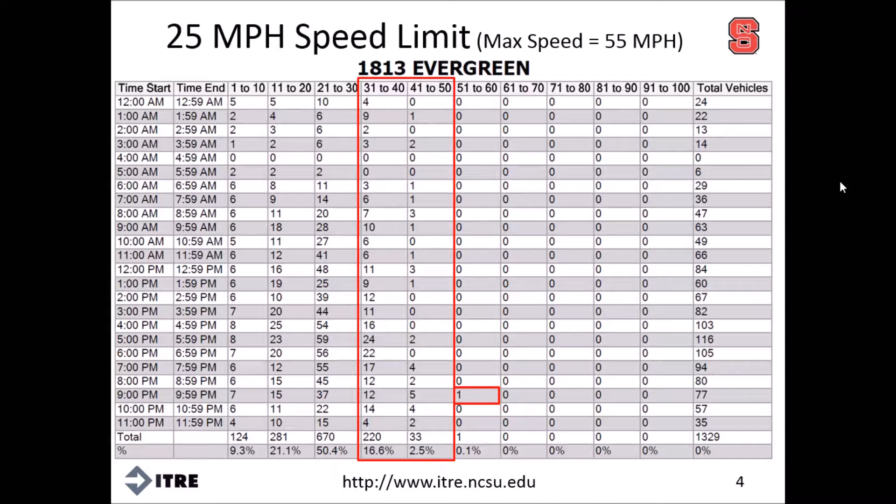But one of the big takeaways from this is that if you think about who the people are who are speeding on these roads, this is not cut-through traffic. These are residents. So within a fairly small neighborhood community, most of the people, or probably all of the people who are exceeding the speed limit, are actually people who live on the street. And if those people can't be motivated to maintain safe speeds, to increase safety or increase livability of the street, you can imagine it would be difficult to get other drivers, particularly those just cutting through a neighborhood, to observe safe speeds. And really the heart of this issue is when you look at the relationship between vehicle speed and pedestrian fatality rate.

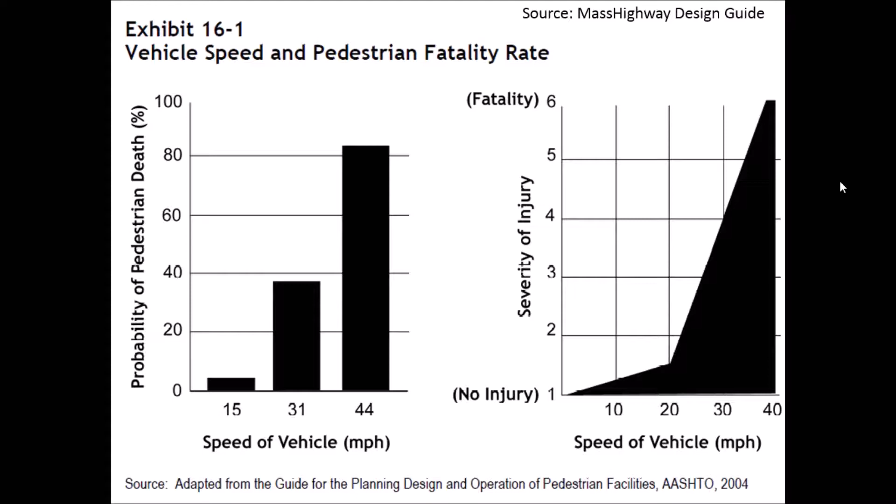So this is really the crux of the issue when we look at traffic calming and the impacts of speeding in relation to pedestrian and vehicle strikes.

When we're talking about traffic calming, the state of the practice document from the FHWA and ITE states traffic calming as actions that serve to minimize the undesirable impacts of motor vehicles on local human activities. Accessibility and mobility should not significantly be reduced. So there's a balance here that needs to be struck between the local human activities and then on the vehicle side, accessibility and mobility. So it is a delicate balance, and some places have done this better than others.

It's not the same thing as traditional street design, but the goals really are similar. Typically, traffic calming is a retrofit to an existing street, and the programs that address traffic calming can be fairly simple or very diverse.

Streets, traffic problems, and neighborhood preferences are not all alike on all streets, and so individual traffic calming treatments must vary accordingly. Programs typically start with one or two of their favorite or preferred measures that have worked well in their communities, and then begin to experiment with others as their favorites may have limitations that become more obvious. The trend is toward diversification, using multiple measures on a single street or at even a single slow point, as we will talk about in the upcoming materials.

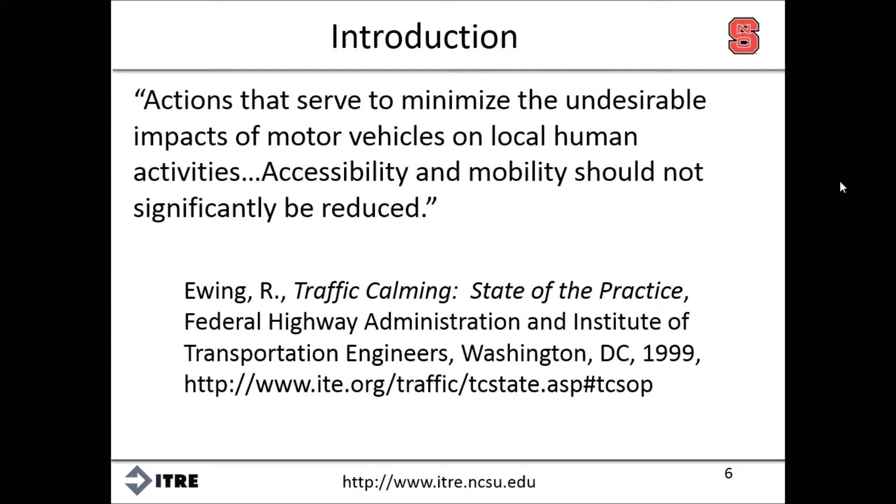The Woonerf is known as a living street, an idea to calm traffic and restore the balance between people and automobiles. This is a concept popularized in the Netherlands in the 1970s as a reaction to the dominance of automobiles. In the first few years after World War II, Dutch transportation engineers emphasized relocating bikes onto separate paths to accommodate vehicles. This created backlash, and the country then moved in the opposite direction, where motorists were forced to make accommodations for everyone else. The intent of a Woonerf is not to make cars disappear, but to integrate them and other users of the street into a shared space.

In 1976, the first Woonerf appeared in the city of Delft. Actually a decade earlier, but the traffic regulations came in 1976, and it has been used there with success in helping to mix vehicles, pedestrians, and bicyclists. So this is a fairly uncommon type of design to see in the world, but it is being done in the Netherlands and other places.

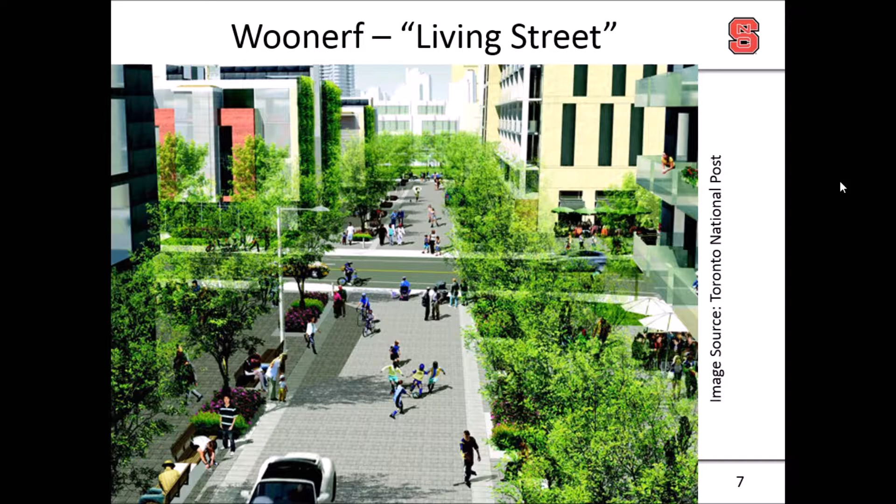This image is actually from a project in Waterfront Toronto that was under construction as of a couple of years ago, so at this point it may be complete.

So we need to think about measures of effectiveness when we think about traffic calming. I've talked about a couple already, primarily volumes, speeds, and collisions, but there are others that may be of interest to an agency, including visibility and forgiveness, setting expectancies for all road users.

Emergency access is a big one, so making sure the traffic calming measures put into place do not unnecessarily restrict access from and to emergency vehicles. Providing space for other users may be a concern. Aesthetics, harmony, and context could be measures of effectiveness, though those may be difficult to measure objectively. You may look at business impacts, the level of rents, house and land prices that may be affected by having higher livability. Noise and air quality may also be important factors for a community.

Typically, speeds are the most important when dealing with traffic calming, and certainly one of the easiest to measure. Emergency access, though, is a big issue and can be a concern or a roadblock to traffic calming. And when we talk about space for other users, this is primarily relating to pedestrians.

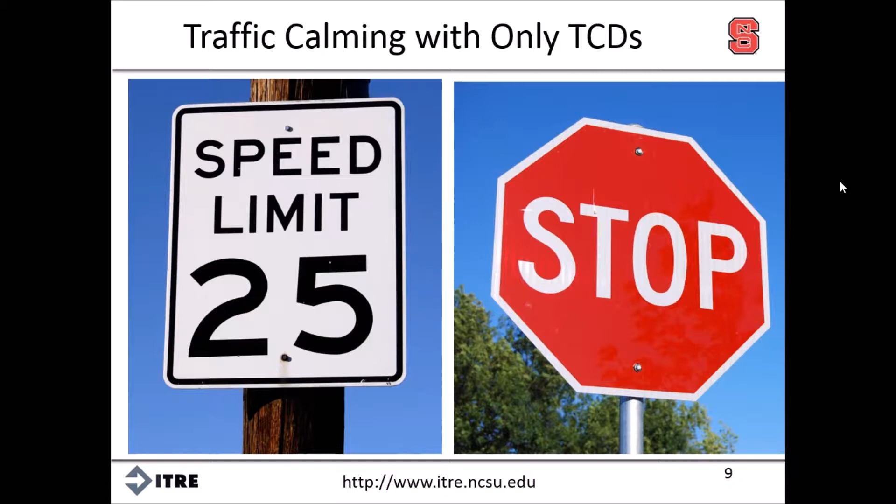Automated speed enforcement also looks promising in terms of a traffic control device, and is being used in limited capacity throughout the United States and more places around the world.

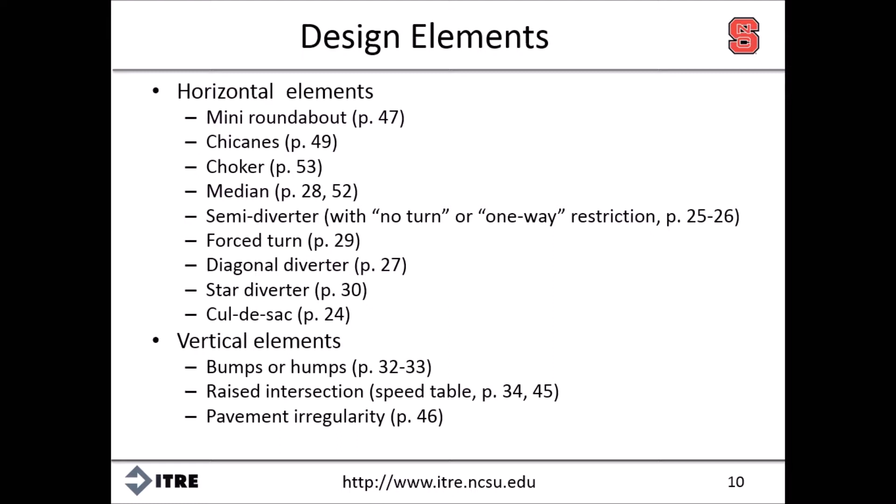There are a variety of design elements, including some that can be lumped into the horizontal elements category and others into the vertical elements category. So in the horizontal elements, we're looking at adjusting the movement of traffic from the left to right, essentially the horizontal direction, and then vertical elements move the vehicle up and down vertically.

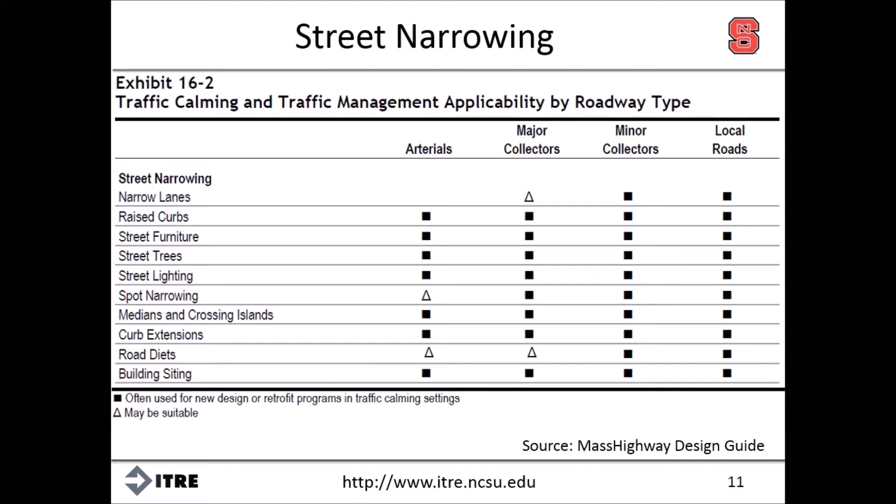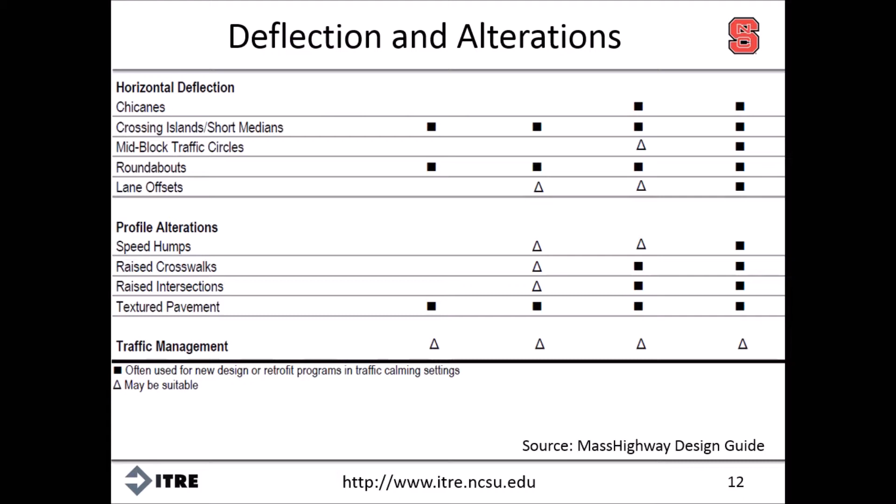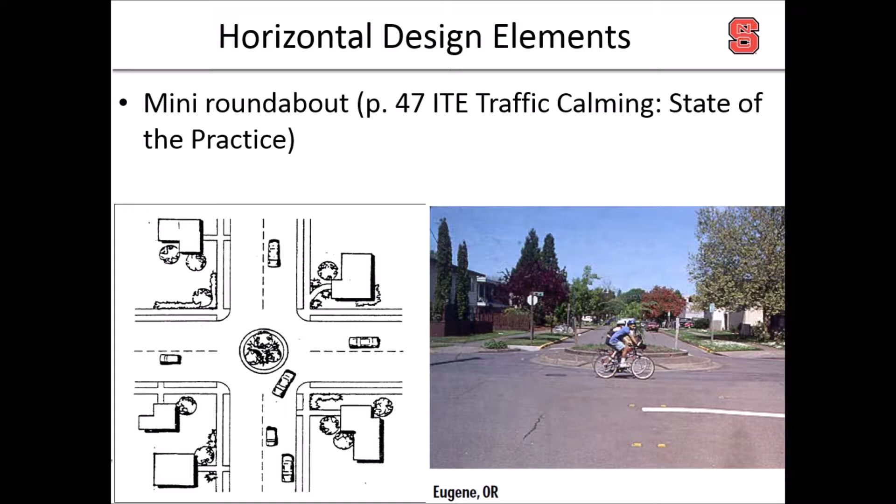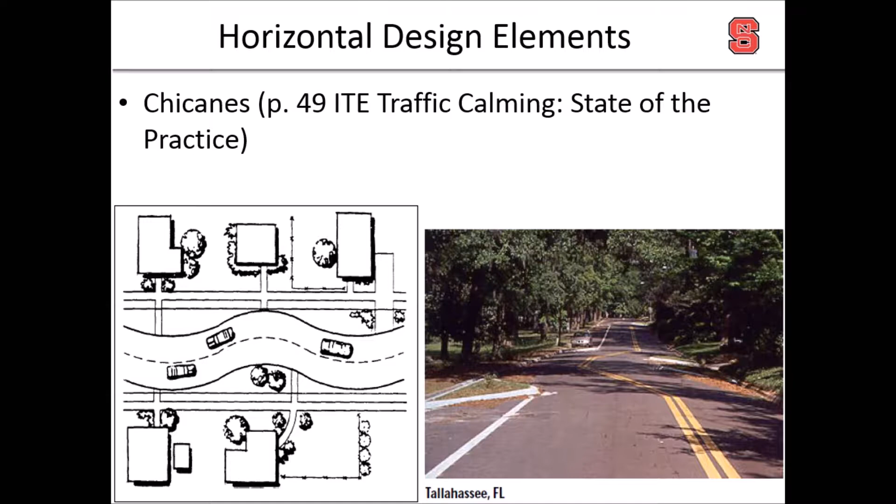Mid-block deflection elements can be added. So this is an example from the Massachusetts Highway Design Guide of how these treatments can be installed and their typical dimensions, as well as street furniture that can be added along the edge of the roadway. And so typically from the roadside design perspective, we usually want to have street furniture or objects further back from the roadway, but when they are close, they do encourage drivers to slow down. So there is a kind of a balancing effect that's necessary there to balance the safety effects of potential collisions with these objects with the traffic calming nature of them.

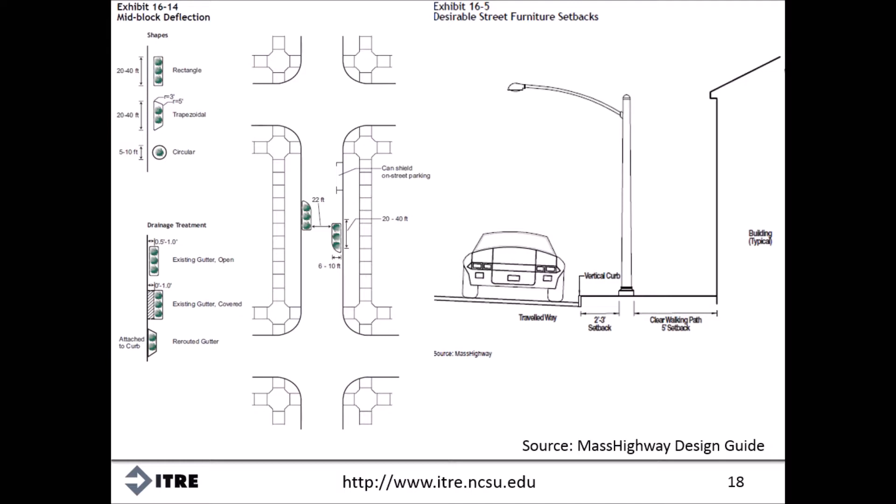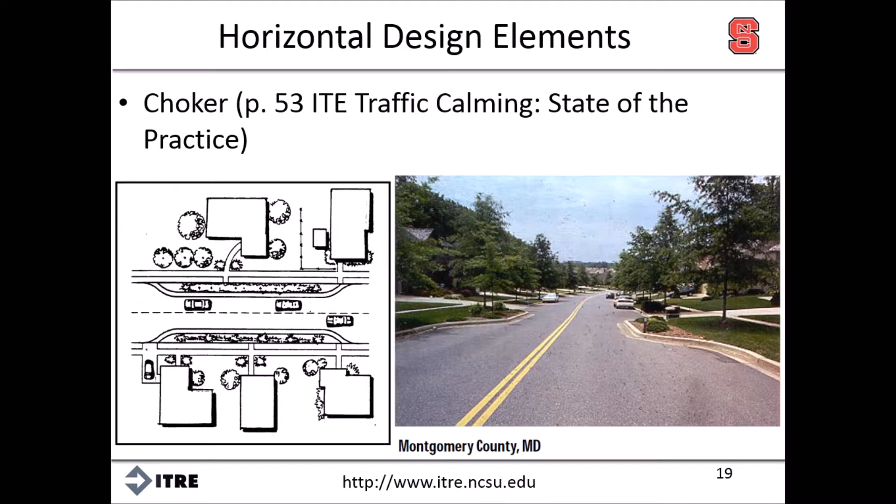A very similar type of design is a choker. So this is just basically squeezing in of the roadway. So if you have a large roadway, particularly one that has on-street parking, if that on-street parking is not commonly utilized, it may be beneficial to add a choker to have that physical narrowing of the roadway at this point. These are also called pinch points, mid-block narrowings, mid-block yield points, constrictions, and maybe other names.

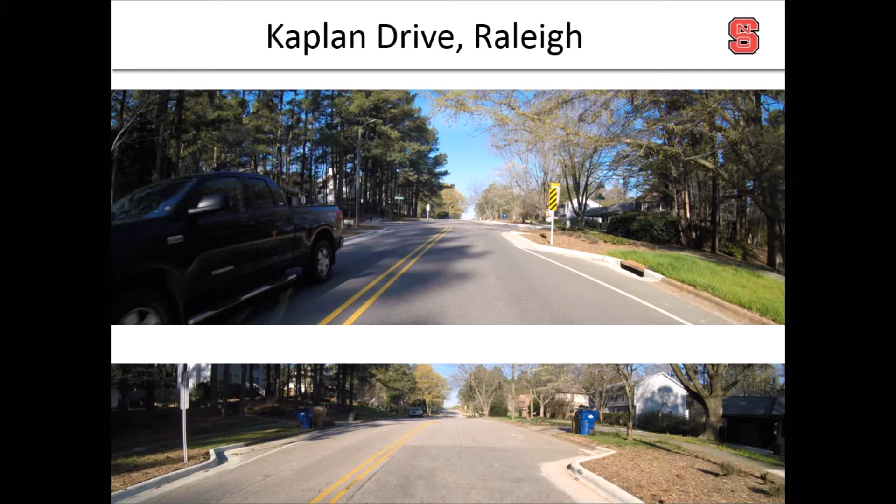Here's an example locally, Kaplan Drive in Raleigh, that has some chokers, again just kind of pinching in or narrowing the roadway at points. Otherwise, the normal cross-section on this road allows for on-street parking, but as you can see in these images, there's not a lot of on-street parking, so there's typically not much friction that on-street parking provides to the vehicles. And again, some specific design guidance on mid-block street narrowing efforts.

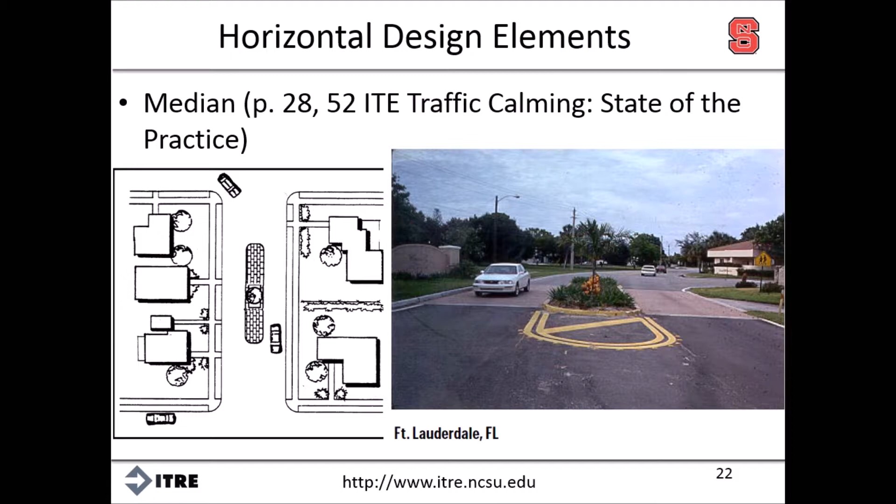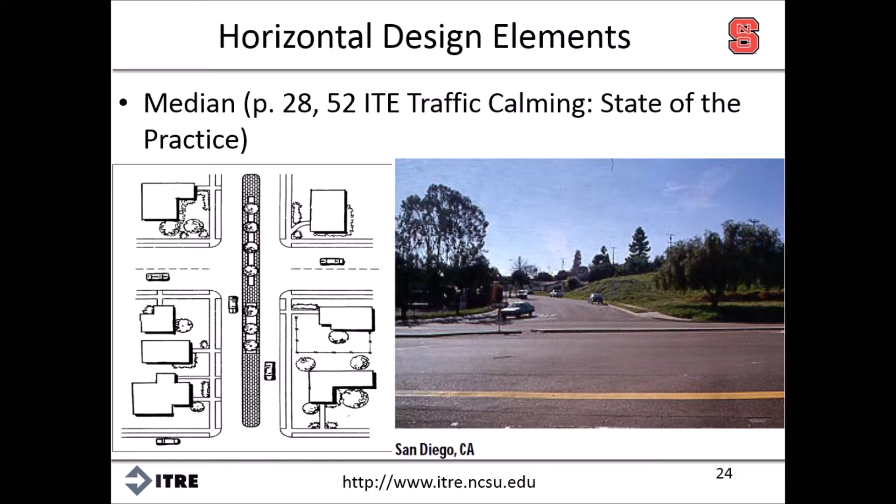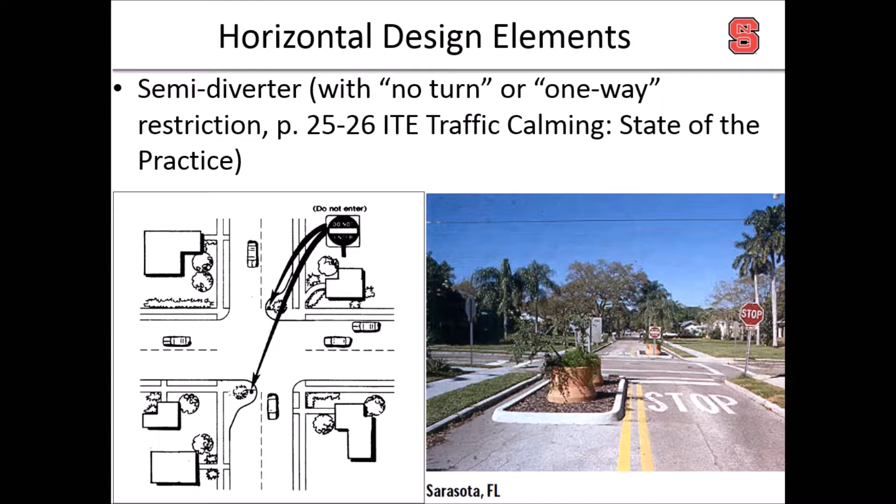Here's another example of a median, in this case also affecting the through traffic between side streets, so that can be another benefit to having a median element in the roadway. There are semi-diverters, so this essentially turns streets into one-way streets, or you can have no turns at these locations. So at the end of these side streets, only one-way traffic going out is allowed. The nice thing about this is emergency vehicles could still access these streets, so it doesn't completely shut down the street for emergency access, but for normal operations, only one-way traffic is allowed at these locations.

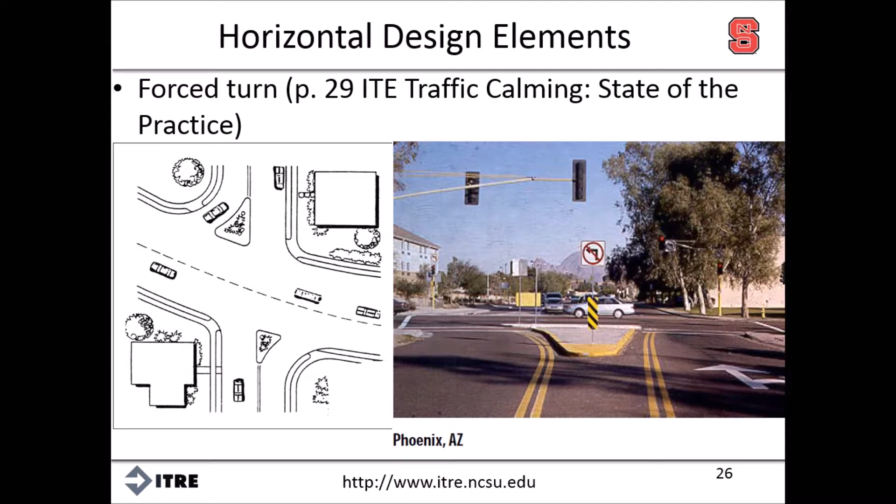You may also have forced turns, so in this picture we see a no left turn at this intersection. These types of islands are also called pork chops because of the shape, or right turn islands, or forced turn channelization. So again, a lot of these treatments may be called different things in different locations or by different agencies.

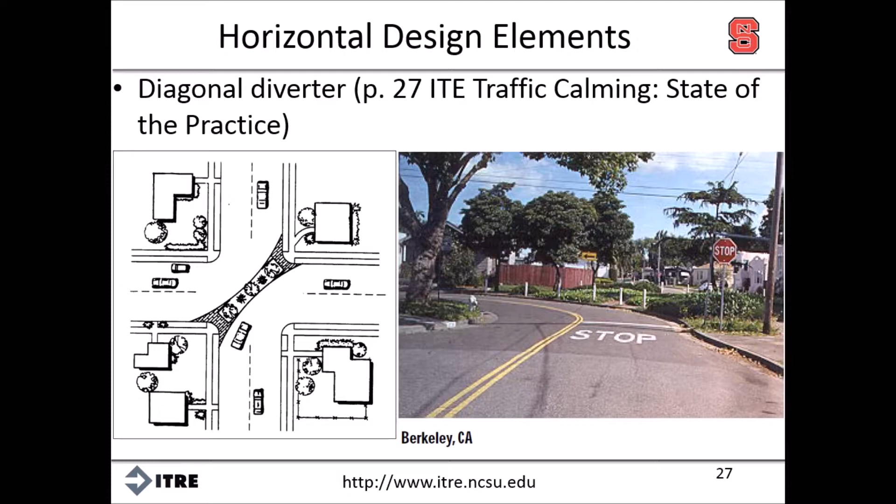A diagonal diverter, also known as a full diverter or a diagonal road closure, essentially shuts down possible movements at a four-leg intersection. You may, though, as shown in this image, allow bicyclists to travel in any direction by making part of the area traversable for bicycles.

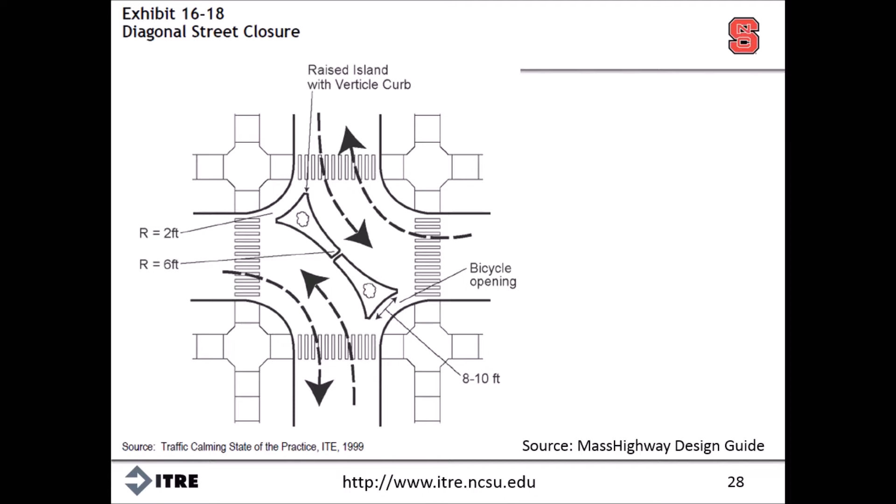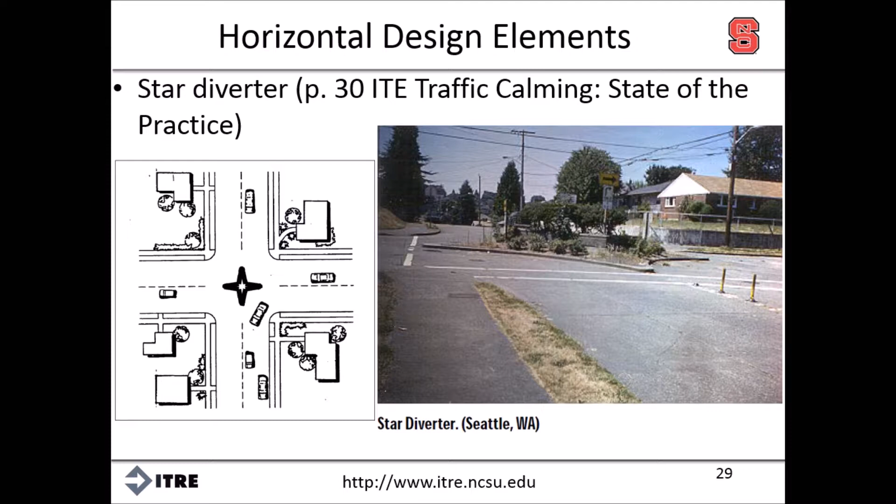And some of these details again shown here that would allow for a bicycle opening with this type of treatment. A similar concept is the star diverter. So instead of allowing some of the through movements, it basically forces everyone into a right turn at each of the approaches to the intersection.

Cul-de-sacs may also be used. Actually, this is a pretty severe design element, so shutting down the street for through traffic. But again, you may allow access through the street for emergency vehicles or for bicycles.

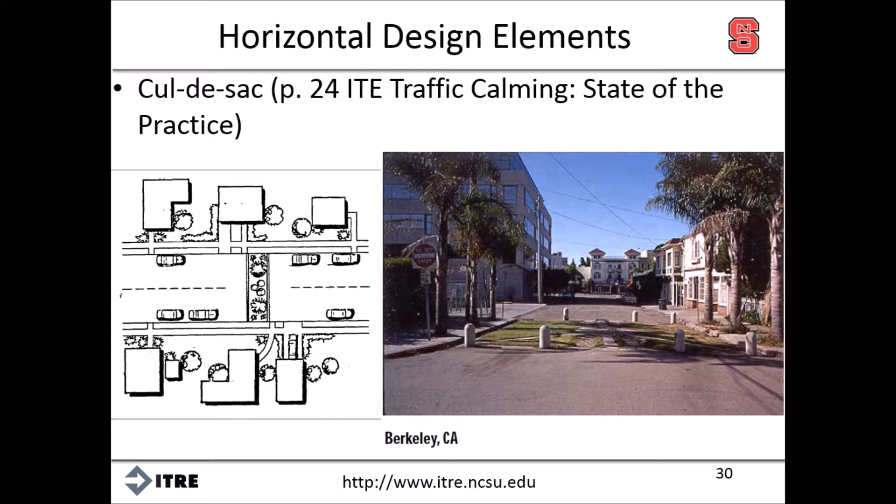Other elements may be specific to parking, again using the on-street parking to help constrict the flow or the speed of traffic. You may use some fixed physical elements to narrow the lane width, narrow the roadway width.

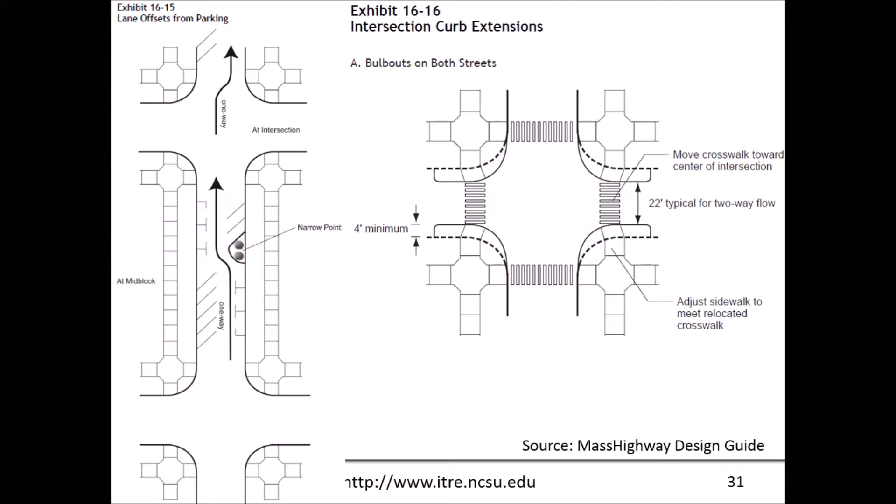Intersections are also an area of concern, a way you can encourage or support pedestrian use by having bulb outs on streets to allow pedestrians to get a little further out into the roadway before they attempt their crossing. This is particularly helpful if there are parked cars adjacent to these locations to allow the pedestrians to be more visible to vehicles and vehicles to be more visible to pedestrians.

There are a lot of vertical design elements as well. It's always interesting to me. Different speed humps have different profiles. It's possible to have some that follow a sine wave or are circular or parabolic or flat topped. And so the next time you drive over a speed bump or a speed hump, see if you can determine which type of design is used.

ITE recommends that vertical design elements, particularly bumps and humps, should only be used on local roads, typically should only be on roads with 2 lanes or fewer, and shouldn't be heavy transit, truck, or emergency routes. Speed should be relatively low on those roads, 30 miles per hour or less.

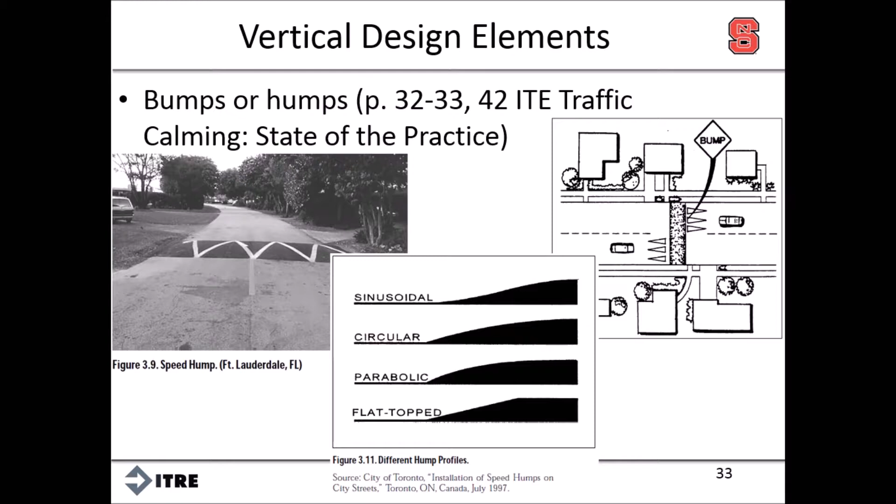It should probably have a speed-related collision problem to put in such an effective and physical element, and shouldn't be near an intersection or a sharp curve, and should also have support from most of the residents.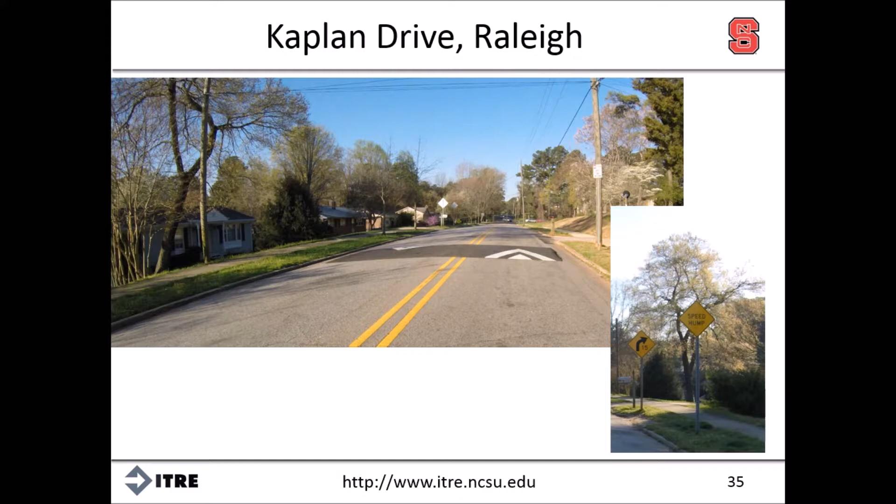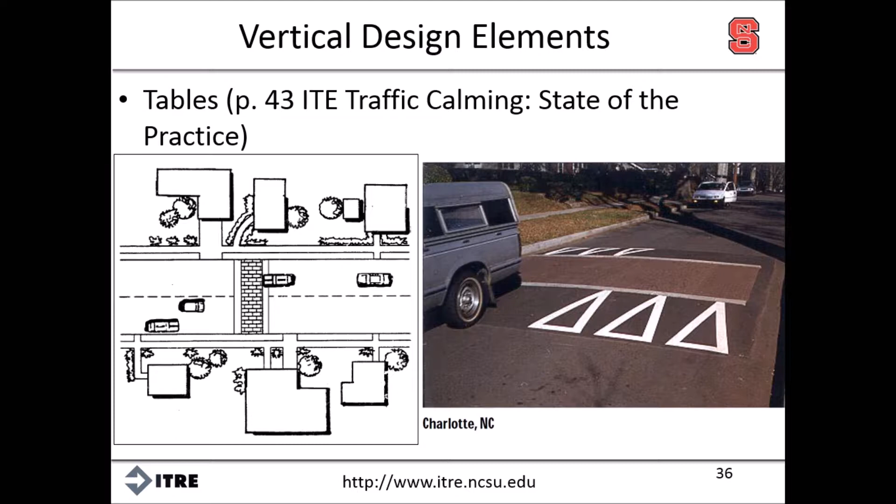Here's an example of a speed table. Several of these are present on NC State's campus. In a similar type of effect, entire intersections can be raised that will help decrease speeds or calm traffic. These are also known as raised junctions, intersection humps, or plateaus, and maybe other names in local agencies.

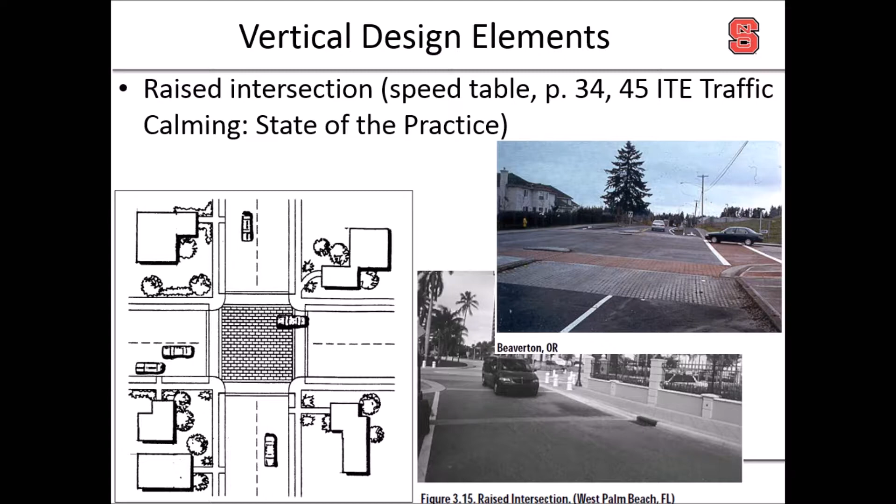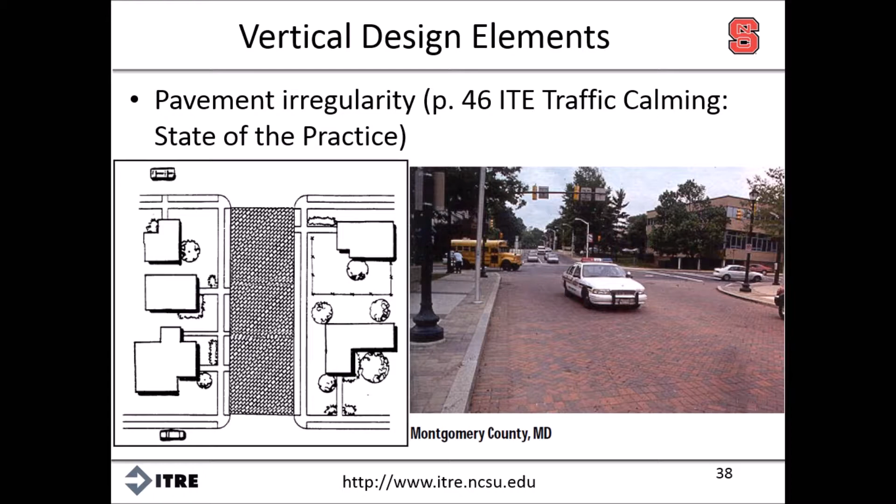Related to that, you can use pavement irregularity to calm traffic, basically sending the message something is different here. There's a different pavement texture. Usually it's very obvious that something is different and that the driver should pay closer attention, particularly to mixing of other modes. Maybe there's a higher prevalence of pedestrians or bicyclists expected in this area.

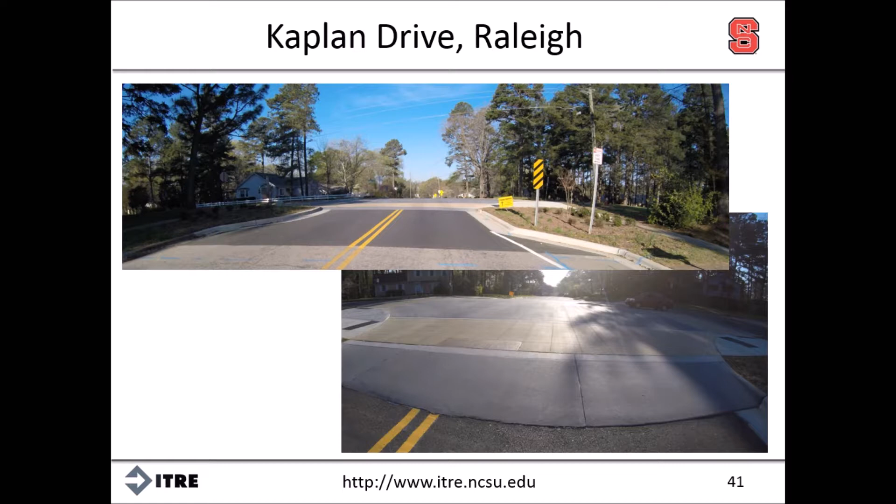And like our other examples, Kaplan Drive does have a raised intersection that also has different textures with it. So again, a mixture of treatments were applied to this roadway segment, a fairly short segment with a lot of different treatments.

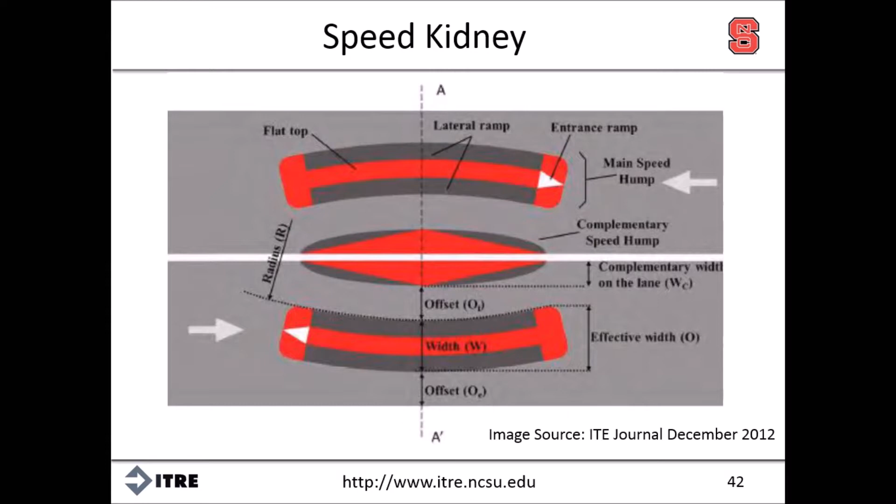A new type of vertical combined with a horizontal element was recently presented in the ITE journal, referred to as a speed kidney because of its shape. And there are several ways this could be driven. It could be driven with one set of wheels that drives up on the vertical element.

The driver could also try to straddle the curved portion without having to drive it vertically, but would still likely slow down the vehicle to make that type of maneuver. Or the vehicle could drive it on a curved path to try to avoid the vertical components of the speed kidney.

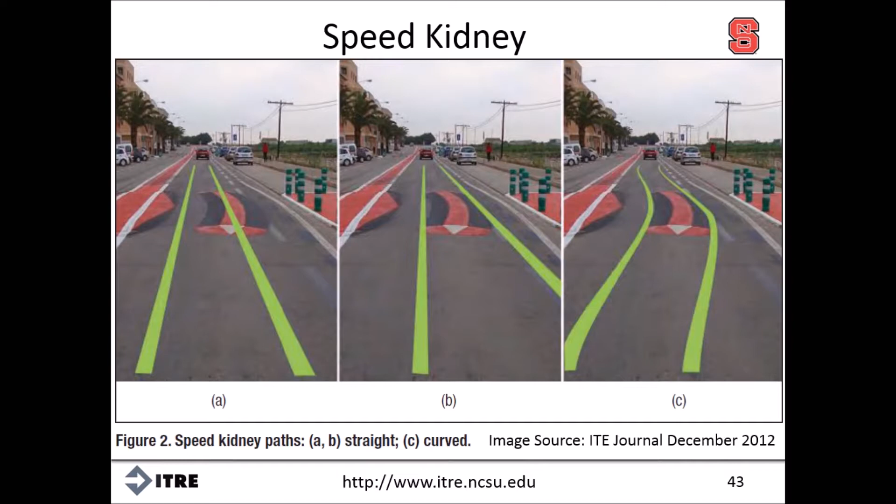So this is again a new idea, and maybe there are other new ideas that you may have that can help with traffic calming or implementing some of these known elements to a new location that hasn't had one before. When we're looking at vertical elements, we have to be very careful about the spacing of those slow points.

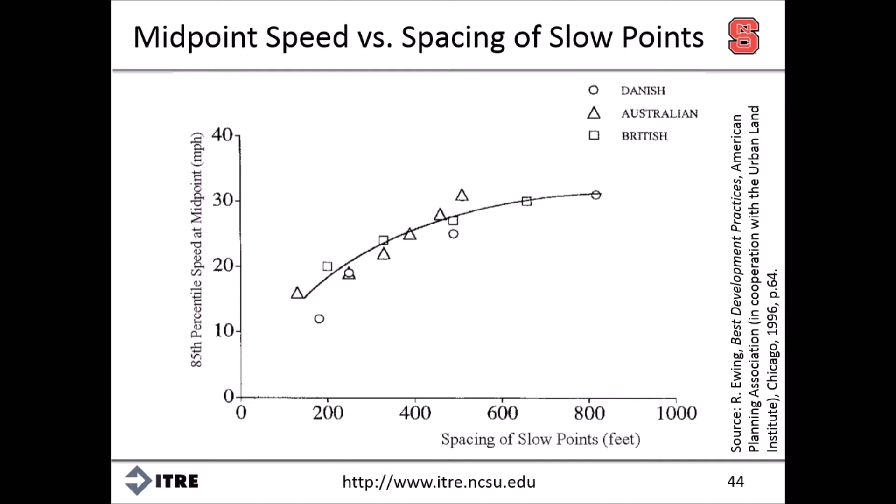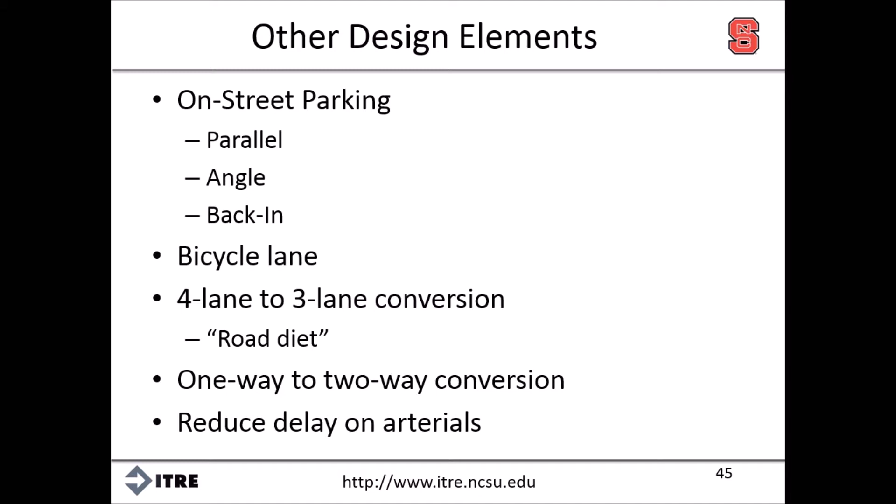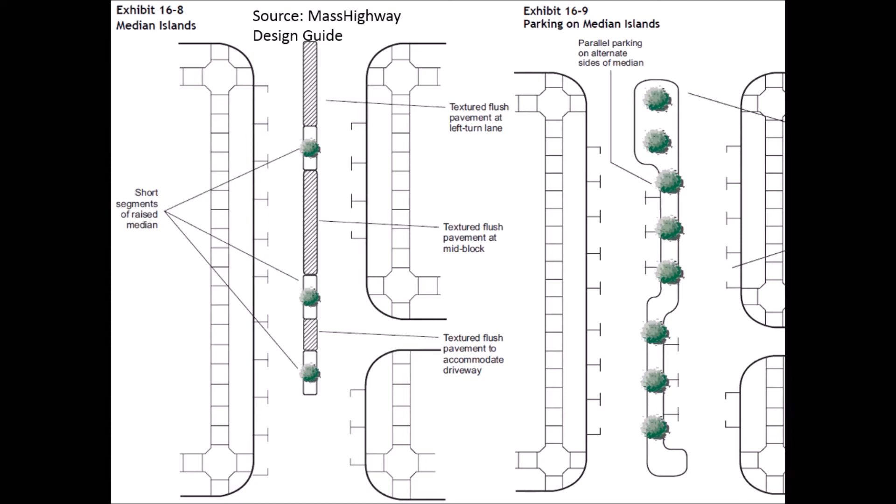And also another option is just to reduce the delay on arterials. So if you want to encourage drivers to leave neighborhoods, leave local streets, if arterials are improved, maybe signal timing, maybe it's a capacity issue, you may be able to divert drivers out of local streets and onto the arterial network, which may be a more appropriate place for them to be to begin with. So we have some design guidance on parking, median islands, some of the dimensions required for curbside parking or head-in or back-in diagonal parking.

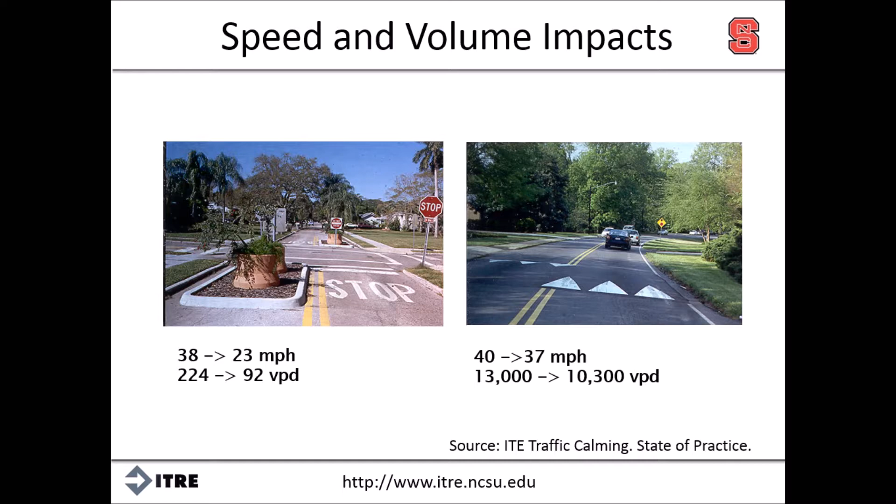So it's also important to consider how the speeds and volumes will be impacted by a particular design. So looking at a couple of these treatments, this one with restricting entering traffic had a substantial effect both on the speed and on the volume. The speed humps had some effect, reducing the speed somewhat and having somewhat of a volume effect. So again, the thing we've got to think about though is we likely did not just lose these vehicles. They didn't just stay home. They're likely on other routes. So we've got to be careful that we didn't just move our problem to the next adjacent street.

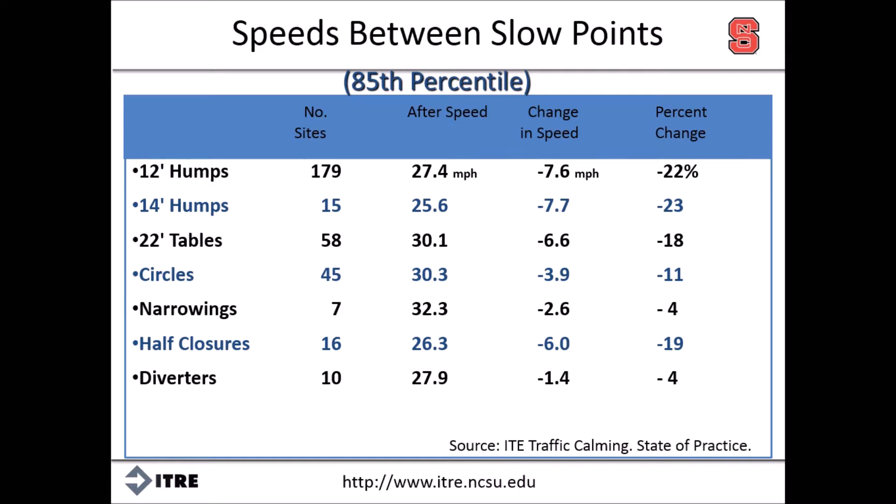A little more details on the speeds between slow points for different treatments. So looking at the change in speed, you can see the smaller humps, or the more abrupt humps, those have a larger effect in reducing the speeds than tables and narrowings, half closures, or diverters, but all of them appear to have the desired decrease in speeds from the before to the after.

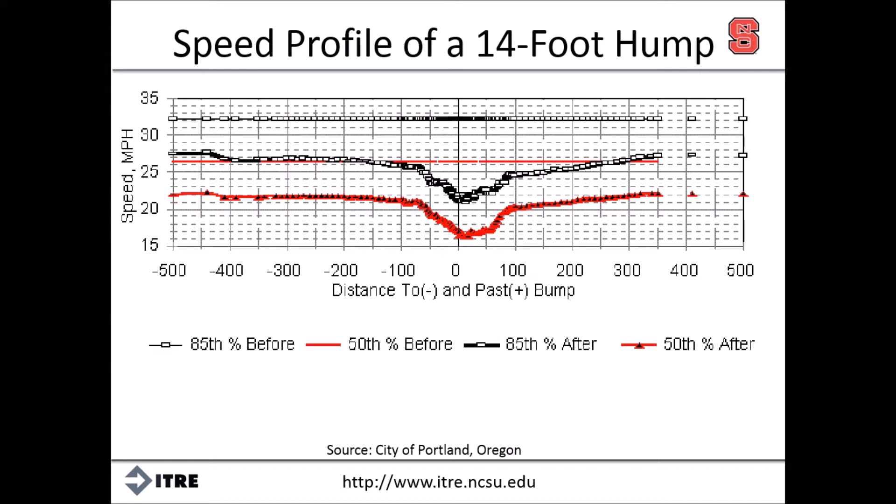And you can see at the point where the speed hump is located, that's at 0 on the x-axis, the 85th percentile speed drops down to 21 miles per hour, and then drivers will speed back up, but still substantially below the 85th percentile speed before the treatment. We see a similar shape to the 50th percentile speeds.

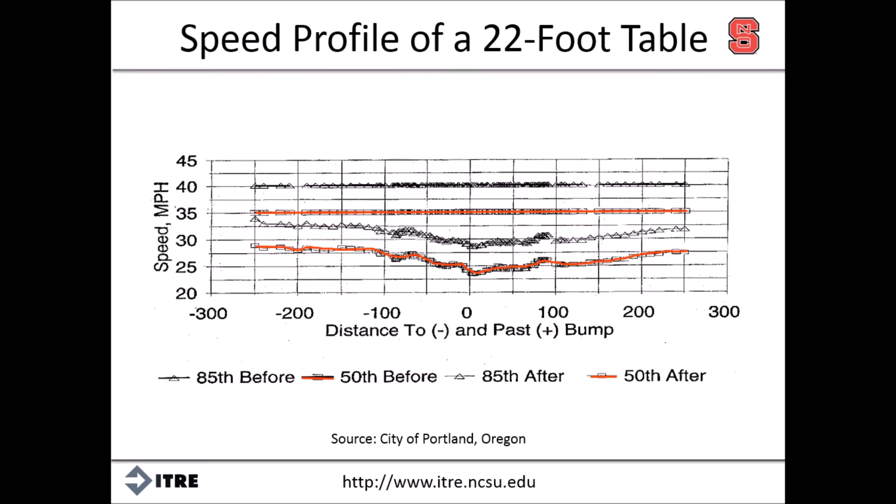And this is the same type of information for a 22-foot table. Both of these were from the city of Portland. But in this table, the speed table, there was less of a pronounced effect on speed, so more of a gradual slowing and then speeding back up compared to the more abrupt speed hump in the previous graph.

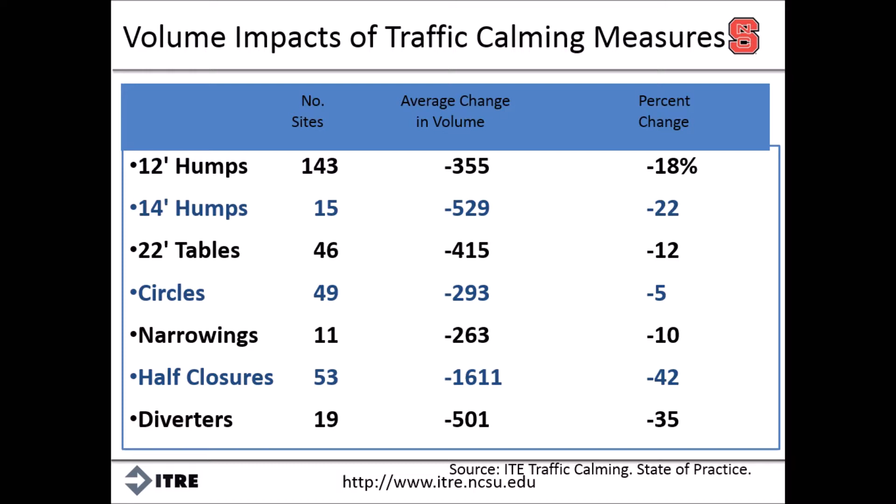It may also be important to consider the volume impact. So the previous information was focused on speeds. How also are the volumes affected? And so we can see with the introduction of these treatments, the volume decreased, some more substantially than others. And the reason for this can be the location.

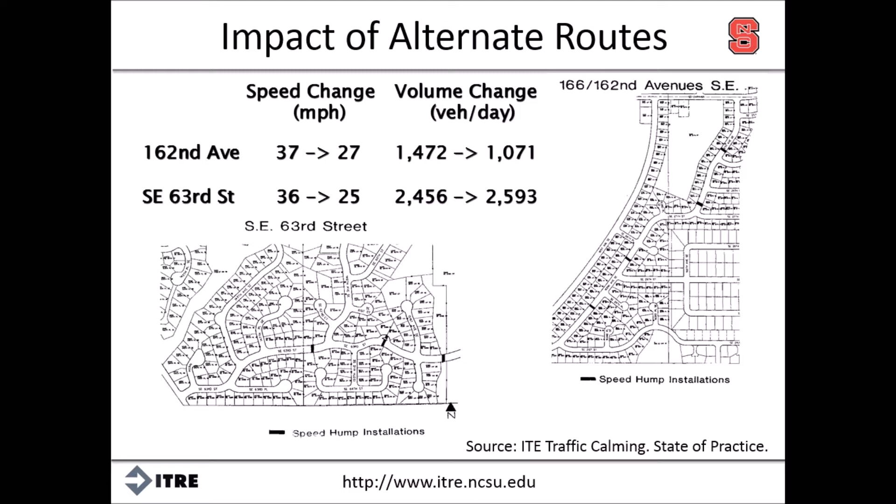So in this image here, Southeast 63rd Street, the speed change was fairly substantial, but the volumes actually did not change. And that's likely because if you look at 63rd Street, which is kind of the main arterial or main collector through this neighborhood area, you can see there really are not many alternatives. But if you look at the image on the right, looking at 166th and 162nd Avenues, 162nd has the speed humps installed on it, with 166th being a reasonable alternative. So basically the volumes there decreased substantially from 1472 to 1071. So likely that additional traffic shifted over to the adjacent route.

In terms of collisions, the international experience has shown substantial savings in terms of collisions with a variety of these traffic calming measures, from chicanes at 82% reduction in collisions, up to, in this graph, showing one of the less effective but still an effective collision reduction factor related to speed limit reductions of 30%.

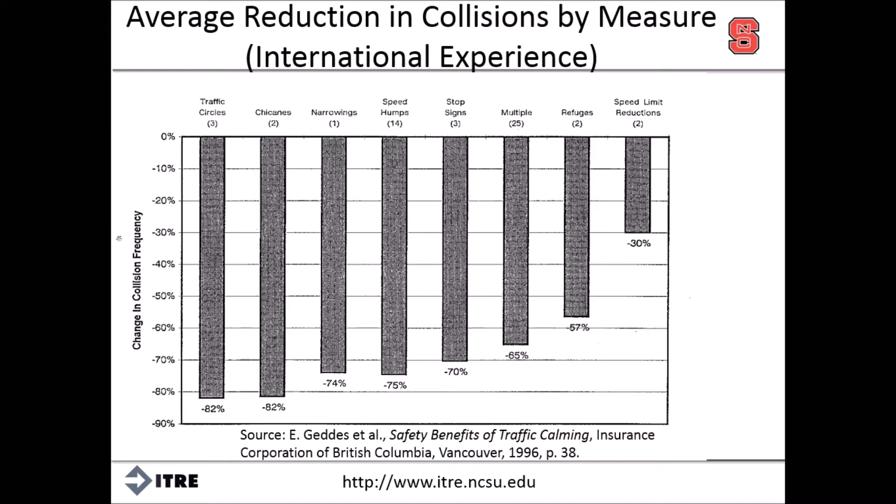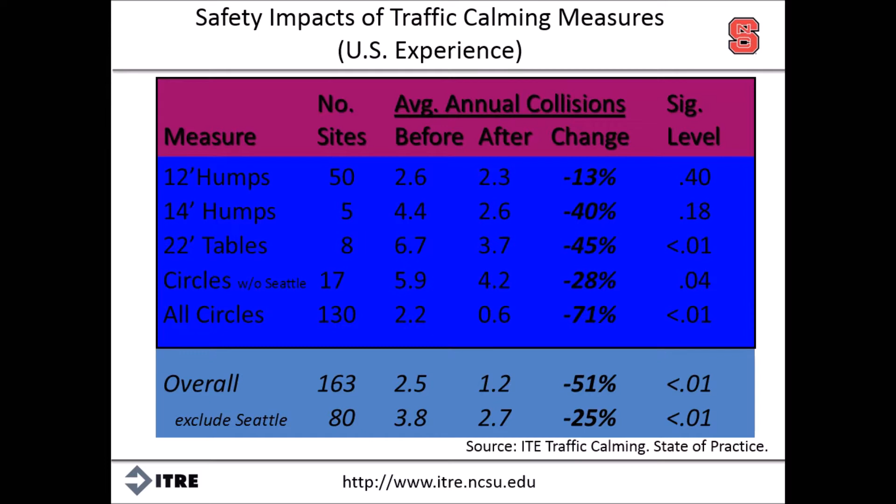In the U.S., there have been changes seen in the number of collisions with some of these treatments. A lot of the more substantial collision savings were found in Seattle, so excluding those, overall with this mixture of treatments, there was a 25% reduction in collisions.

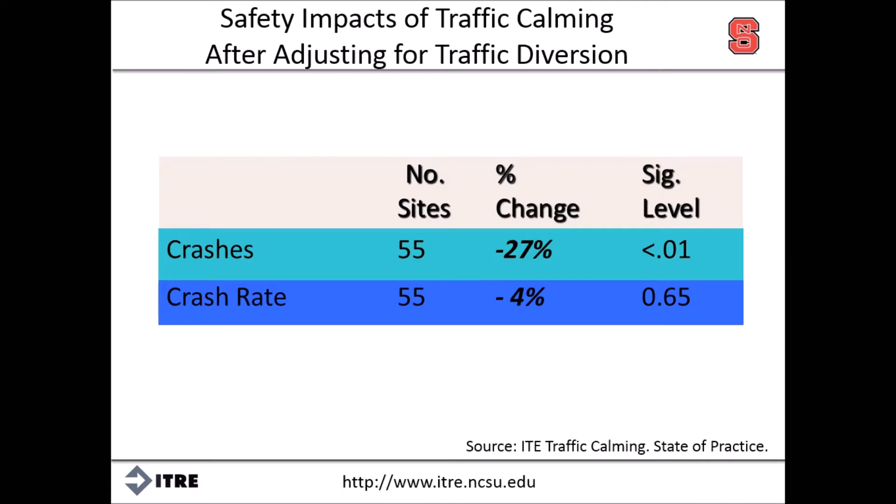But that information can be somewhat misleading, because, as you would expect, if you can discourage people from using the route, meaning the volume goes down, you're likely to see fewer collisions. So if you actually consider the traffic diversion, the crash reduction was 27%, and the actual crash rate was down 4% with the sites included in the study.

Looking at British versus U.S. installation, there was a change in speed for these vertical elements that was much more substantial in Britain than in the U.S. For the sites included in this study, there was actually an increase in collisions in the U.S. Likely those were rear-end collisions from people misjudging the speed changes of the vehicle in front of them, whereas the British experience saw a reduction in collisions of 57%.

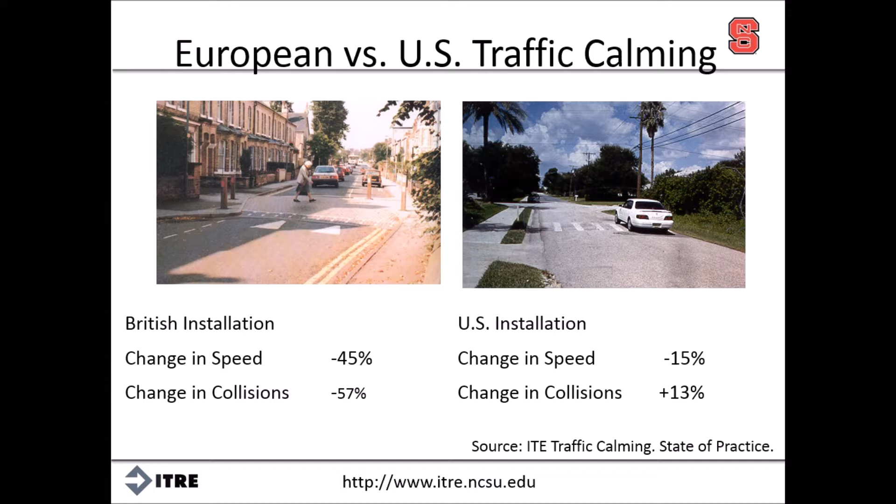As a public agency, particularly a local agency, it's important to work with interest groups and stakeholders, some of whom may be for or against the traffic calming measures. These stakeholders include residents, and on the opposite side, cut-through drivers trying to cut through the neighborhood. You may also think about drivers on the arterials, truck drivers, transit and other system service operators, businesses, law enforcement, fire and emergency responders, city council, other local elected officials, and city staff. All these groups may have their own perspectives, so it may be important to help them understand the need for the traffic calming measures and what the plan is for installing them.

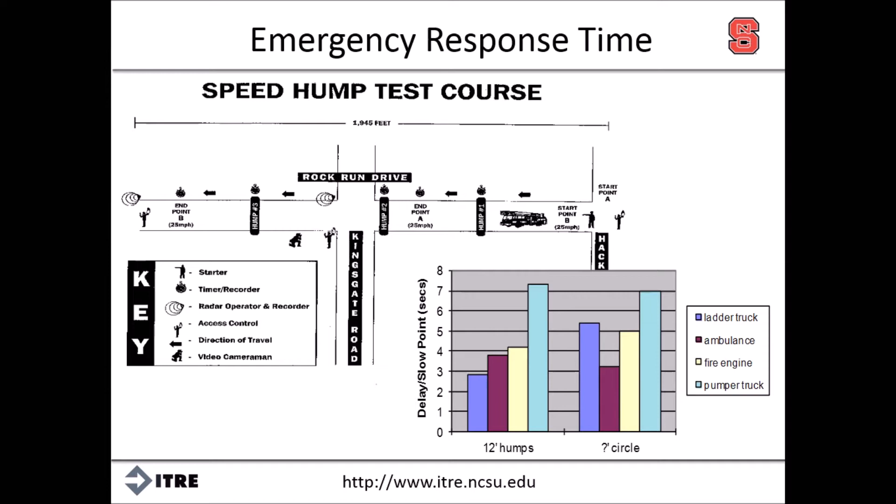Implementation for any civil engineering project is important. Traffic calming is no different, and it's a process that needs to be undertaken, starting with the identification of the problems, which could take the form of speed studies and traffic counts, crash analyses, or other special studies relevant to that particular area.

A consideration for alternatives for traffic calming measures, and the selection of one that is capable of solving the problems. So if the identification of traffic problems finds one type of problem, the alternative should be focused on actually solving that problem. Following that, there should be a prioritization of projects based on the funding that's available, on some objective basis.

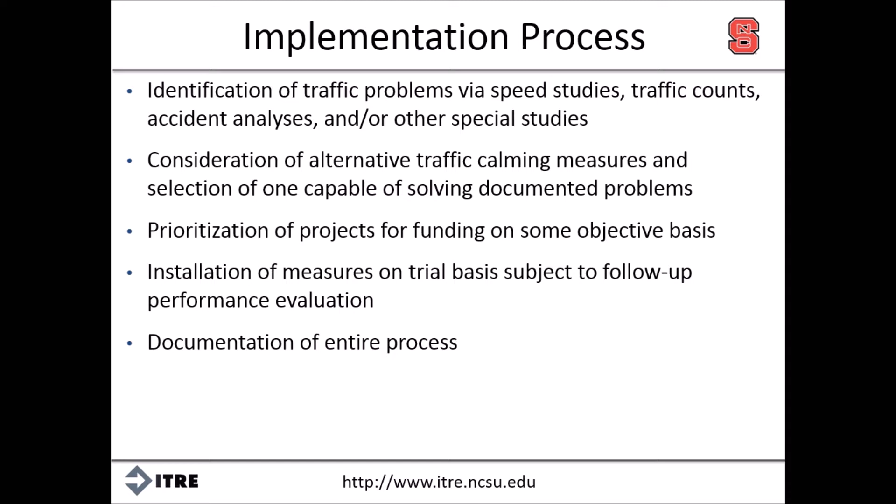Then the installation of measures on a trial basis, subject to follow-up performance evaluation. In terms of a trial basis, this may take the form of: there are 10 locations where this treatment may work, maybe we start with one, or it could mean actually installing some temporary traffic calming measures before a permanent installation is put in place. Documentation of the entire process is very important in case of litigation, or just so lessons learned can be documented and applied to future installations.

From a local agency perspective, a process for public requests can be very beneficial, making sure there's some process that residents can follow to help manage the requests that come in. One way to do that is to have a formal request from citizens, maybe just one page that asks for location, a problem description, which could include the time of day or day of week, and some contact information so a follow-up can be made.

This step in itself likely will decrease the demand for these. So if someone calls and has a complaint, you can give them a productive outlet, but they may not be serious enough about it to actually follow through and provide the necessary details.

After the study is completed, if no problem exists, it could be useful to share data on pedestrian safety with the neighborhood groups, maybe deploy a mobile speed radar to help appease residents. That way the residents can monitor the speeds, maybe report back to city engineers, possibly work with law enforcement officers to send letters to speeders.

But if a problem exists, it's important to gain consensus from the neighborhood, maybe through a petition, holding public meetings, testing planned treatments with temporary devices, so using paint and cones and barrels before actual horizontal features are installed, and then installing the planned treatment if that test was successful and had the desired impact.

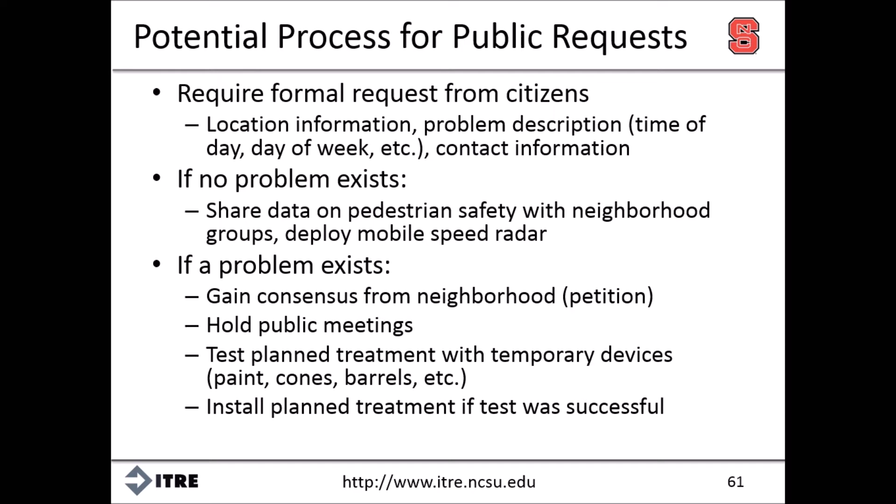The City of Raleigh has a formal process that allows people to request a residential speed reduction, a multi-way stop request, or a traffic calming request by giving their contact information and a description of the location and request.

The City of Raleigh also has information on this. One of their first strategies is a reduction in the posted speed limit. Speed limit reductions to 25 miles per hour can be considered on local streets carrying less than 4,000 vehicles per day, but a petition is needed with at least 75% of adult residents or property owners along the street. If that petition is received with that level of support, staff will prepare a request for the city council. If the council approves, new signs reflecting the speed limit change will be installed within one week.

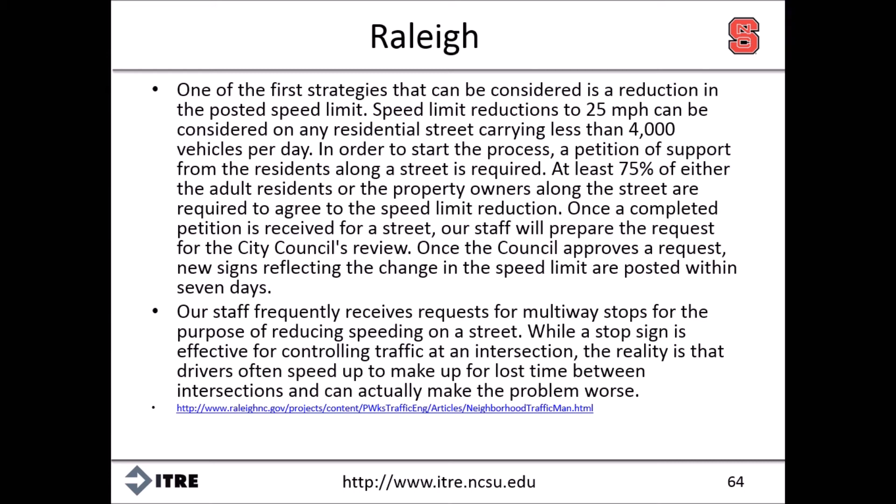They also have information about multi-way stops used for the purpose of reducing speeding on a street. Importantly, while a stop sign is effective for controlling traffic, drivers will often speed up to make up for that lost time. It's really not an effective measure for reducing speeds, and may actually make the problem worse in the long term.

The margin of approval is important. We saw the City of Raleigh requires 75%, which is more of a super majority. A simple majority would just be 51% of the community supporting the traffic calming. In a survey of public agencies, the median approval requirement was two-thirds, with a range from 51% to 80%.

The support likely varies depending on who you ask. Residents on the street that would get the traffic calming likely have high approval because they want the traffic in front of their house calmed, whereas residents on adjacent streets likely do not support it because they expect traffic to be diverted onto their street. So the scope of that petition is very important.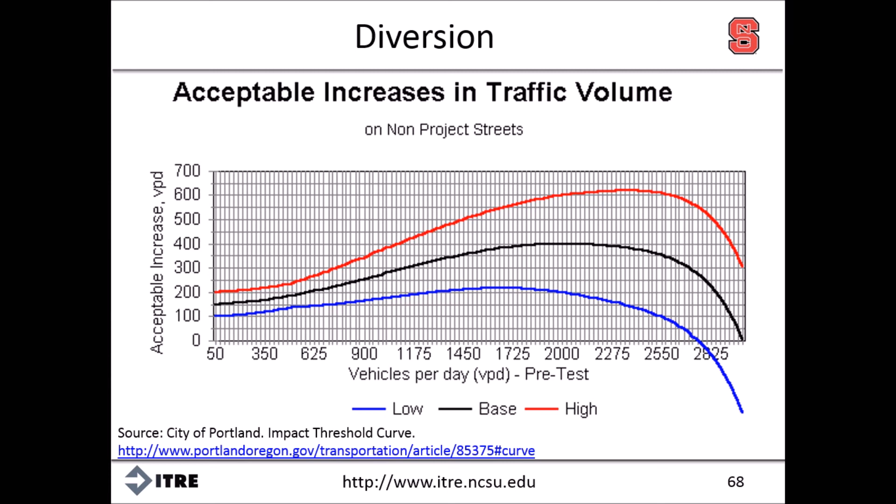To summarize the traffic calming process: it's essentially a well-accepted retrofit. There are lots of alternatives, and we've talked through some of them, but more exist. It's important to have a plan, an involvement process, and very clear objectives if you're going to undertake traffic calming measures, and it's important to consider the system-wide effect, looking not only at that local street but the effect on adjacent streets.

Overall, the advantages of traffic calming include reductions in speeds, reductions in the number and severity of collisions, encouraging walking and bicycling, reducing the dominance of vehicles, and increasing the sense of community by decreasing community severance, particularly where a higher speed or higher volume road is in the area, or speeds are higher than what the context would suggest.

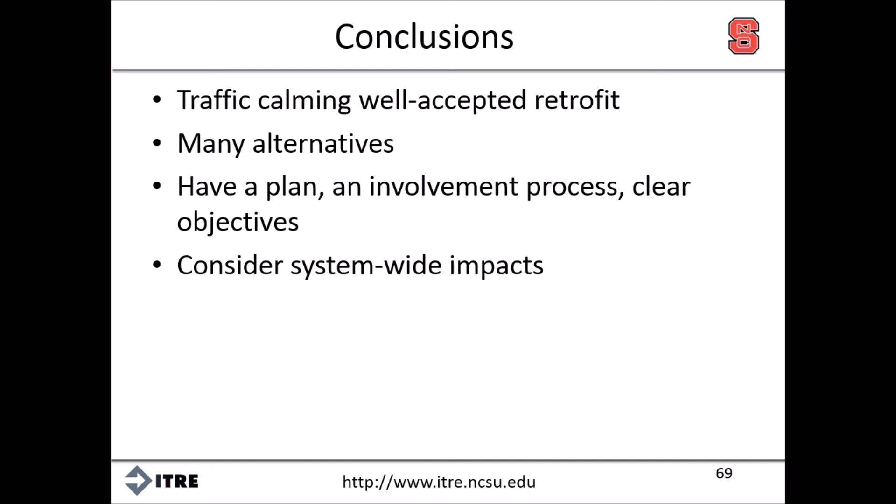Some disadvantages of traffic calming could be discomfort from drivers and passengers, particularly from some vertical elements, and potential to cause damage to vehicles. These treatments likely increase maintenance costs, adding complexity to design, construction, and follow-up maintenance. It can also increase emergency vehicle and transit travel times, as well as noise and emissions, since more decelerating and accelerating is likely to increase those noise effects and the potential for emissions.